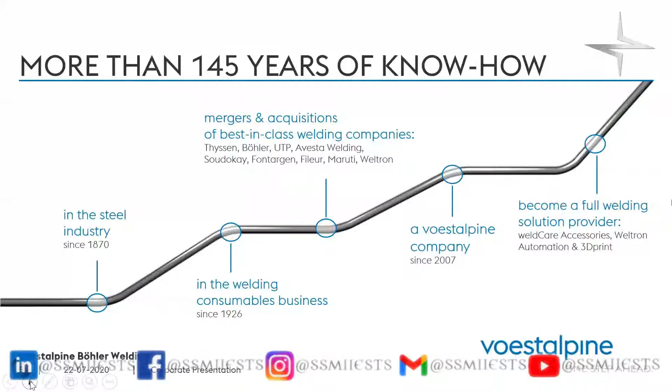So what do we do in this welding consumables business? Basically, we cater to every arc welding application that can be thought of. We are into weld cladding, joint welding, maintenance and repair. We also have a range of finishing chemicals for post-weld cleaning of stainless steel beads. We are into soldering and brazing. And also the new businesses we have launched, like automation solutions, weld care, 3D printing, and equipment. Next.

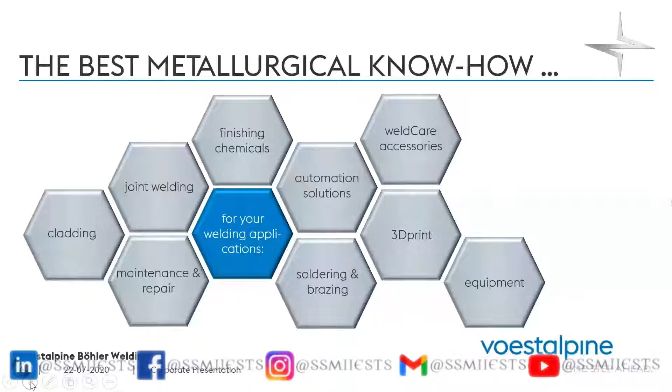voestalpine Bohler Welding has a very long tradition of innovation, and this is really what has kept us ahead of the rest, let's say one step ahead. We are quite strong on creep-resistant filler metals, mainly for power plant and boiler construction and fabrication, and we've been working with Indian boiler manufacturers for many years for these welding consumables. We have now developed a range of nickel-based consumables for the next generation power plant technology, which is called the advanced ultra supercritical technology.

We launched many years ago vertical down basic electrodes for cross-country pipelines. You saw the year 1926. In 1926, we launched Seelendraht, which is basically the German word for flux cored wires. And this is still the technology which runs the flux cored wires of today. And then, of course, a lot of other things like double-coated electrodes, fully synthetic electrodes, etc. Next.

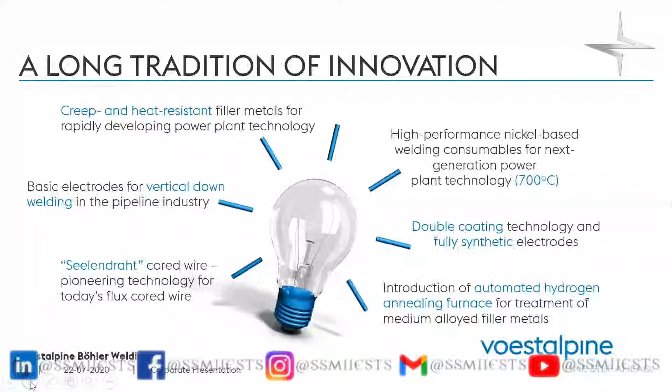So we are a multinational company, as you have probably understood by now. We have more than 2,000 employees in 25 countries with 2,000 distributors across the globe. Next.

In India, we've been in the country for a long time, but as a company with a permanent office for the last 15 years. Mostly we are in Mumbai and Delhi, and we have our factory at Bhiwadi in Rajasthan, where we acquired this company about 6-7 years ago. We locally manufacture welding consumables here, apart from sourcing consumables from our 13 global factories. We also handle neighboring countries like Sri Lanka, Bangladesh, and Nepal out of India. So this is the region India that we have. Next.

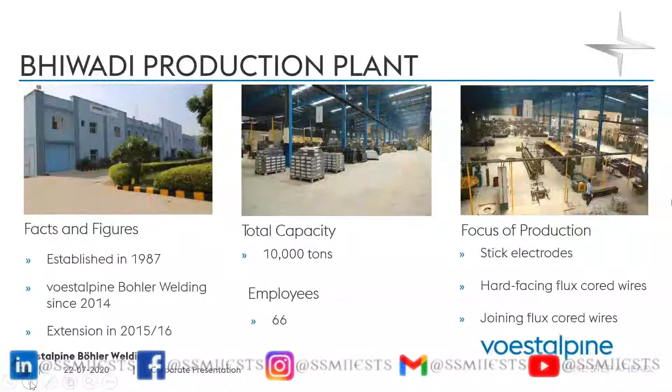Some pictures of our Bhiwadi production plant. As I said, this was part of Bohler Welding since 2014. We have a capacity of 10,000 tons per year of welding consumables. Mostly it's stick electrodes. We also make flux cored wires here, hardfacing as well as joining flux cored wires. Next.

So we present ourselves in the market with three brands and three competencies. We have the Bohler Welding brand, which is mainly the joining range of consumables. UTP Maintenance is for M&R, maintenance and repair. And we have Fontargen Brazing for soldering and brazing applications. Next.

Bohler Welding is the brand under which we have about 2,000 products, which cater to the joining requirements of our customers, starting from joining of simple carbon steels to stainless steels, nickel-based, you name it. This is a brand where we promote the concept of lasting connections. This is the philosophy of this brand. Like you saw earlier, this brand is more than 80, 90 years old. It's been in this industry for a very long time. And the philosophy is that it connects both steel as well as people. Next.

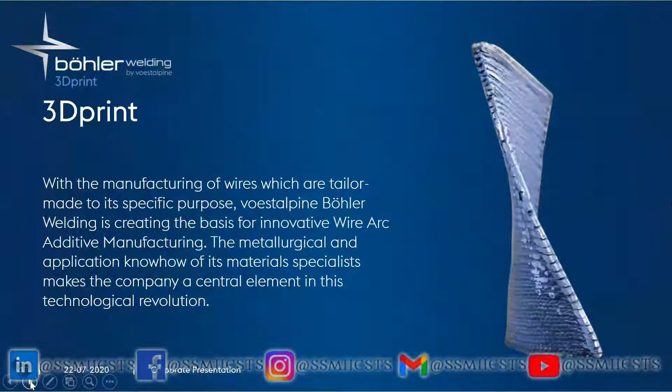We have done a lot of work with research laboratories and institutions, mostly in Europe, on the development of the wires and the procedures for 3D printing. And we have in fact got a lot of interest even in India from industries as well as institutions for working on this. Next.

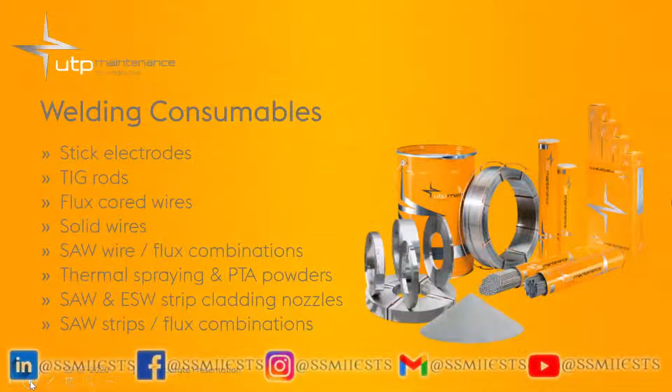Here we cater mainly to, let's say, the steel industry, sugar and ethanol industry, cement, mining, etc. Next. Here again, we have the entire range of consumables, including thermal spray powders, submerged arc and electroslag strip cladding, flux and strip combinations, as well as the accessories for feeding the strips. Next.

Can we go next? Yeah. And I have already moved actually. Yeah, sorry, maybe it came a little late.

Okay, so the last brand we have is Fontargen Brazing. So we kept talking about welding, but we have another, let's say, soldering and brazing portfolio, which is mainly meant for non-ferrous alloys, mainly I would say copper. And this is our brand for that, called Fontargen Brazing, for all kinds of soldering and brazing applications. Next.

So here we cater to mostly car bodies, car engines, and HVAC or the air conditioning industry, as well as the tooling industry. Next. So for this, we have brazing rods, foils, paste, powders, as well as copper wires and preforms for these applications. Next.

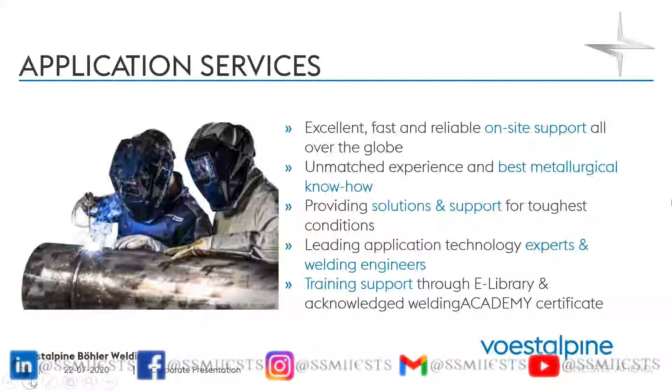In addition to our products, we also offer a lot of application services, which are basically, I would say, how-to-weld services. So we of course have the products, but many of our customers need to know how to weld and how to make sure that you get a good metallurgically sound weld. So we have a team of welding engineers and application technology experts who support our customers both in India as well as globally on these applications. Next.

And we have a welding academy, which is essentially where we have courses mainly for our customers and, let's say, in-house people like distributors and sales teams. We are not a college. We don't give any degrees or anything, but it's mainly for sharing our experience and our expertise with our customers for specific welding challenges. Next.

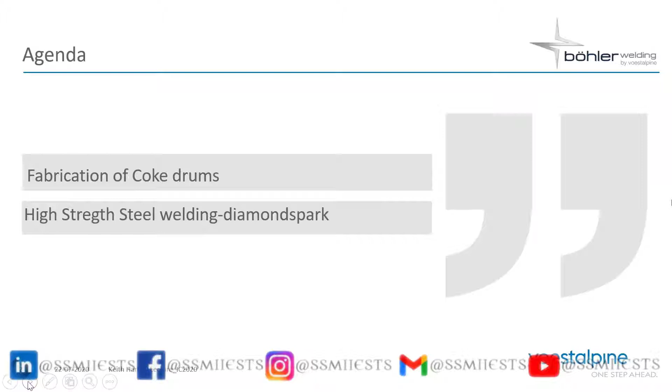And in service, what basically happens is that there is a lot of thermal and pressure cycling in this steel equipment, and this results in certain damages. And because of these damages, the refinery operator has to basically shut down the refinery. He has to either cut open that section and put a new one, or maybe even replace a coke drum.

So I'll just show you some of the damages that actually we have taken pictures of from service, and what is the solution for this. Can we go next? Next.

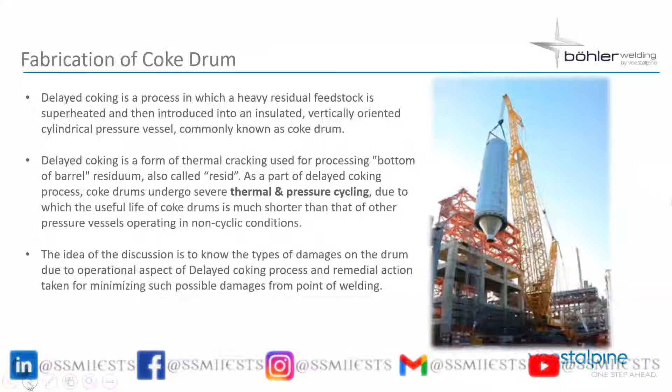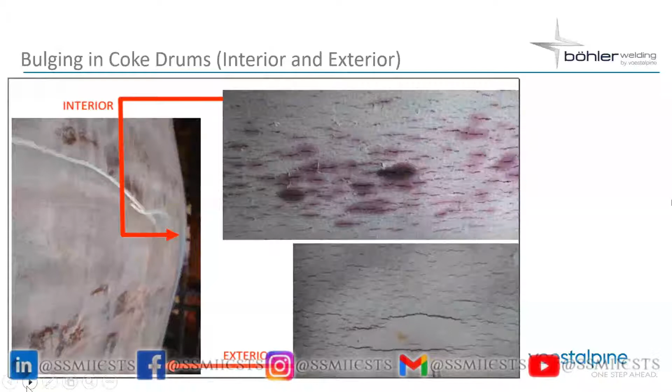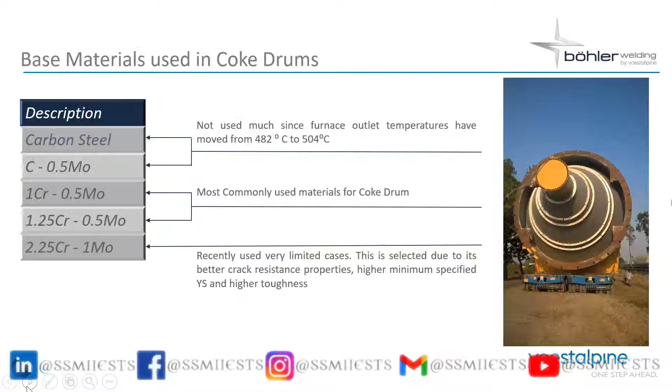Okay, the material used for this coke drum is basically 1 1/4 chrome half moly. This is the most common material. And on your right, what you see actually is a coke drum being transported to IOCL Haldia. In fact, this picture was taken just outside Haldia refinery, where an Indian fabricator had fabricated the coke drum on the west coast of India and transported it across sea, and it was getting commissioned in IOCL Haldia. Next.

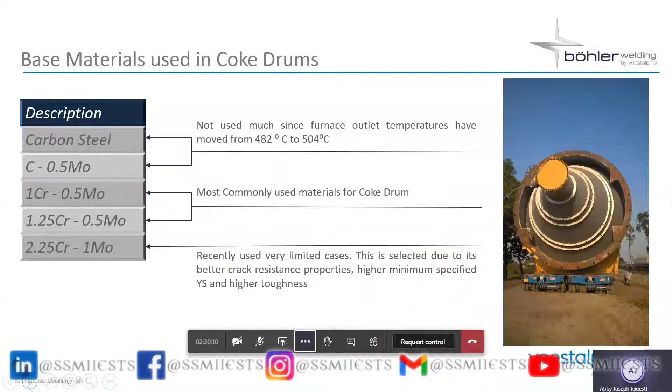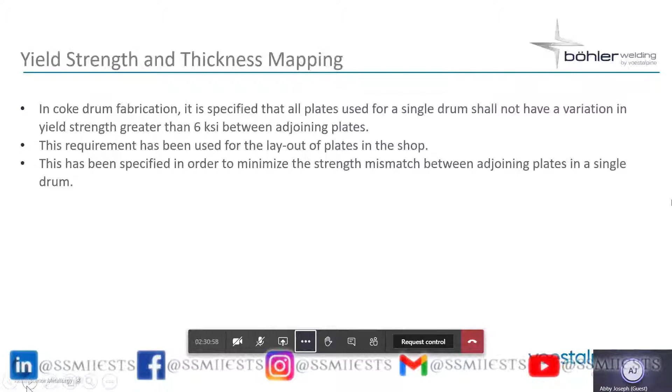So here the problem is that this bulging happens. What people found out in such an application is that it was because of the difference in the yield strength between the weld metal, the weld seams, and the parent material. So what they did was that not only the welding part, but also in terms of fabrication, it was specified that for a single coke drum there would be a mapping of the adjoining plates with the yield strength, and the layout would be made in such a way that there would be a variation of not greater than 6 KSI between adjoining plates. Can we go next?

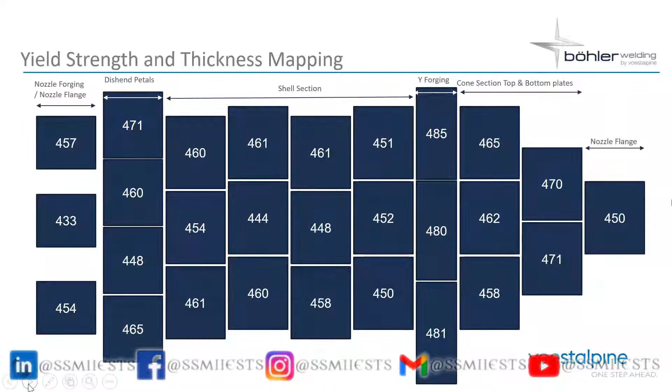So, for example, for the dished end petals, you have between 470 to 450, and then towards the other side, in the cone section, you have 465, 458. Next.

And the challenge for us as welding consumables manufacturers was that we had a limitation from the fabricator that we had to develop consumables. It was 1 1/4 chrome half moly. That's fine, that is a common consumable, but with a yield strength matching the base material yield strength within plus or minus 10%, and this in consumable manufacturing is not so easy. So it was a big challenge, and it needed a full R&D project to arrive at this.

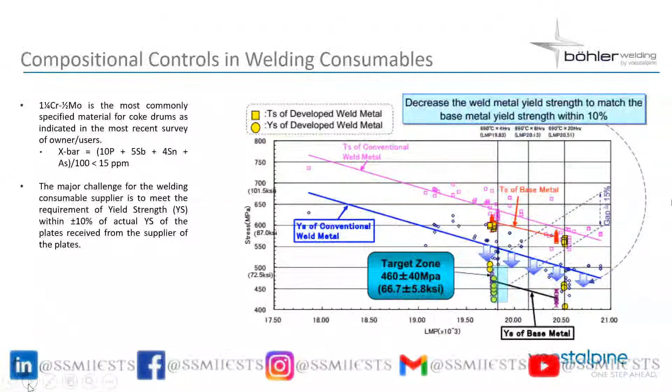And this graph basically shows you the bandwidth within which we had to consistently maintain the yield of the consumables batch after batch, so that it was within plus or minus 10% of the plate material yield. Next.

And so you have the mapping of the plates, you have the consumables which are matching, but after that, during the fabrication, there were many more constraints, like the weld finish, to make sure that there were no stress concentrations, that the weld finish was extremely good, to improve the fatigue life of the coke drum. And we talked about thermal cycling in the beginning.

And also here there was an additional requirement that even for temporary attachments, an approved welding procedure specification had to be qualified before allowing even temporary attachment welds to be made during fabrication. Next.

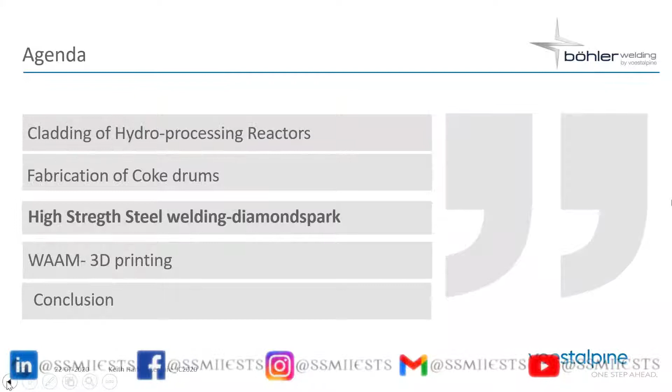So that was one of the examples which I gave, about coke drum fabrication. Now I go to another one. This is what we call Diamond Spark, which is basically our range of seamless flux cord wires, introduced about 3 to 5 years back. It's mainly used in many industries, especially oil and gas, upstream, downstream, etc.

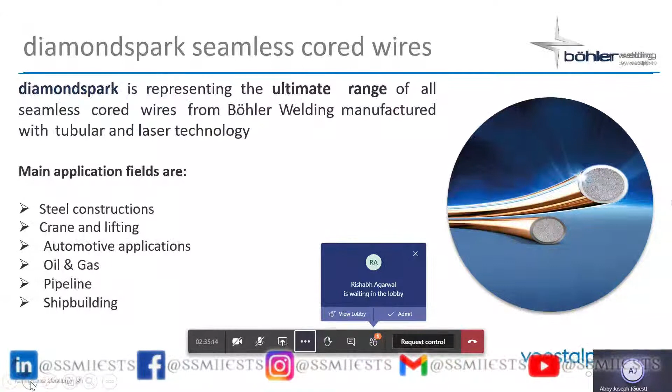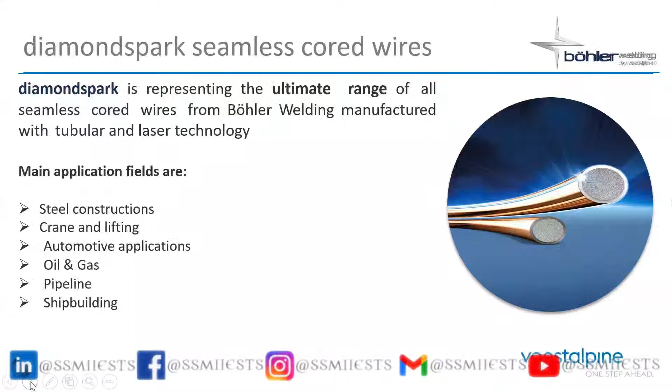So this is our range of seamless flux cord wires used during manufacturing. It uses both tubular technology as well as laser seam welded technology. Main applications are steel construction, crane and lifting, automotive, oil and gas pipelines, and shipbuilding.

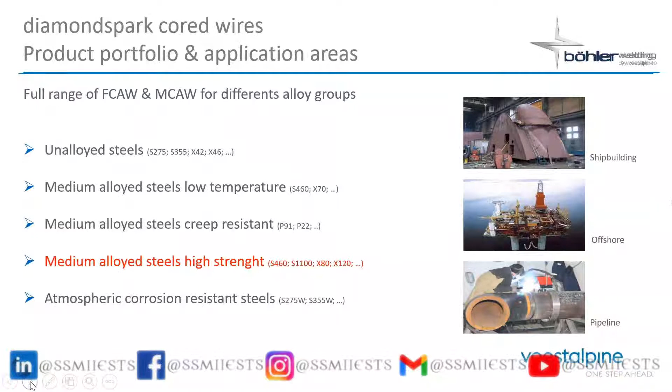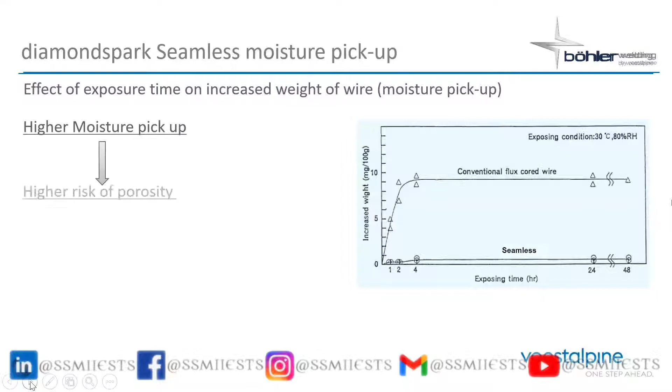With higher moisture pickup, the chance of porosity and therefore repair is very high. This is what we wanted to avoid with this new manufacturing technology called seamless flux cored wires. You can see that even over long exposures of 24 to 48 hours, the hydrogen levels stay less than 2 or 3 milliliters per 100 grams.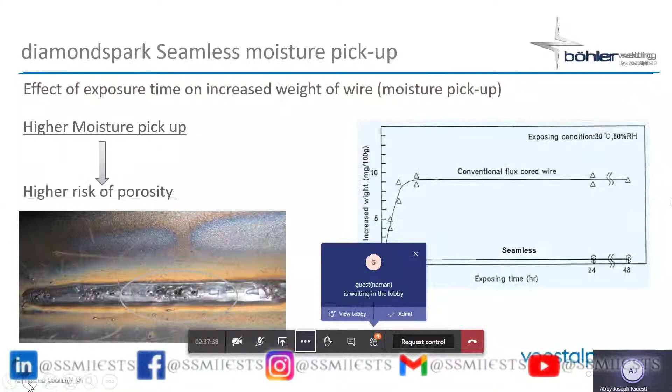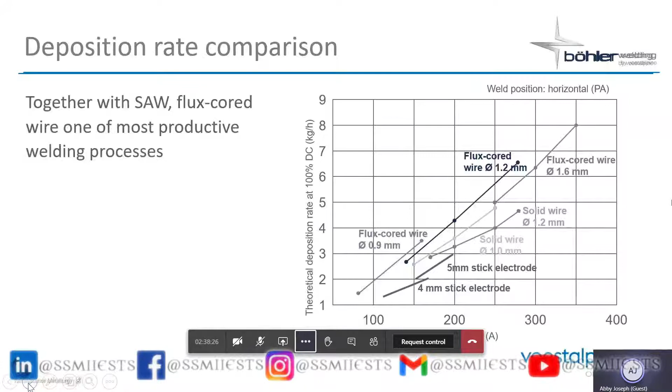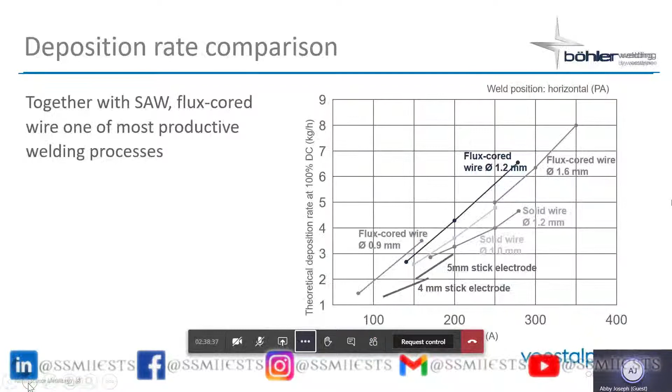Flux-cored wire is also a very productive welding process. You can see here the productivity versus stick electrodes. If you look at the 1.2 millimeter flux-cored wire, it can give a deposition rate all the way up to about 6 to 7 kilograms per arc hour, compared to a 4 millimeter stick electrode, which can give at most 2 kilograms per arc hour. So you have almost 3 times the deposition rate in flux-cored wires compared to stick electrodes, and this is the reason flux-cored wires are picking up more and more in terms of process in India versus stick electrodes.

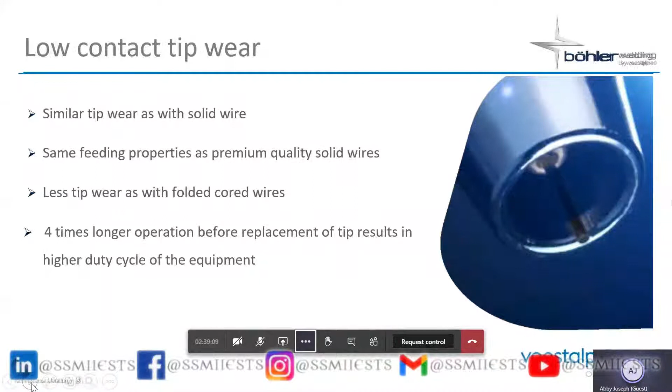With the seamless wires, another feature we worked on was the contact tips. Some of you who have done MIG welding in college can understand what I'm talking about. When the wire comes out of the contact tip, there's a likelihood of the tip getting worn out because of friction. Because this is a copper coated wire, and because of the way it's manufactured, it's a much stiffer wire, so the tip replacement interval is almost 4 times longer than a conventional flux-cored wire.

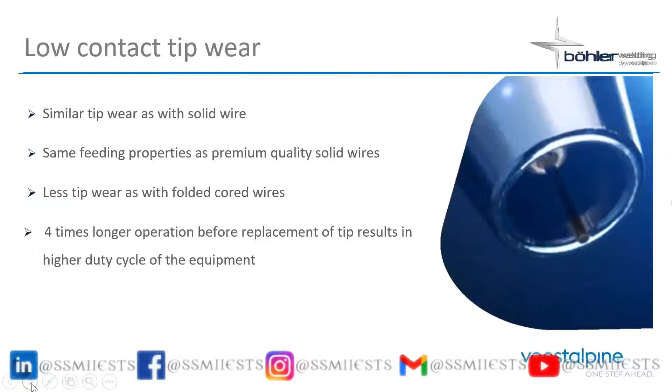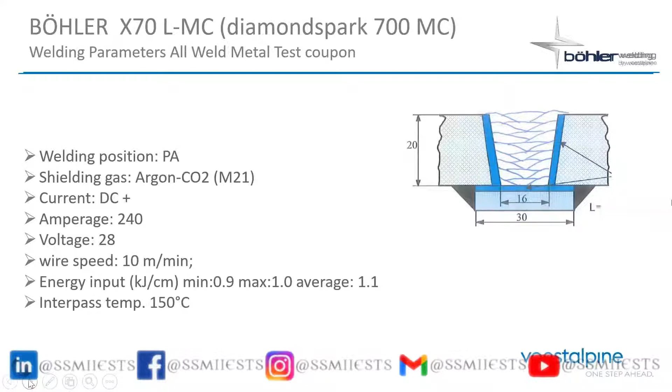This is a particularly high-strength steel welding wire called diamondspark 700 MC. These are the welding parameters we've used, basically a mixed gas argon CO2 mixture in downhand position, on a 20 millimeter thickness plate.

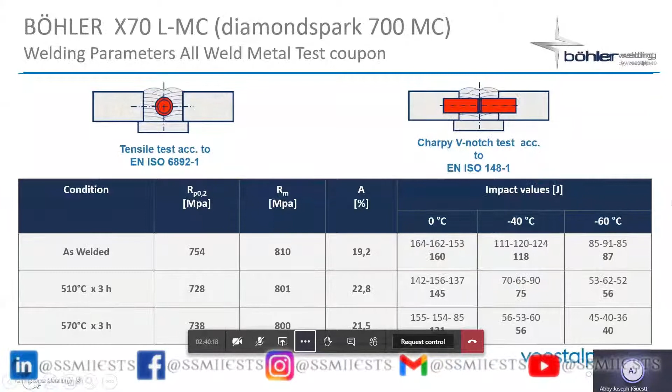These are the all-weld test coupon details. This is just one result, but from a welding consumable development point of view, we need to do many such tests in our laboratory to actually prove these consumables before they are launched in the market. We did it in an as-welded condition, also with post-weld heat treatment at 510 for 3 hours as well as 570 for 3 hours. These are the results we got: consistently the yield was above 700, 725 megapascals, UTS of more than 800 megapascals, as well as impacts right up to minus 60 degrees centigrade.

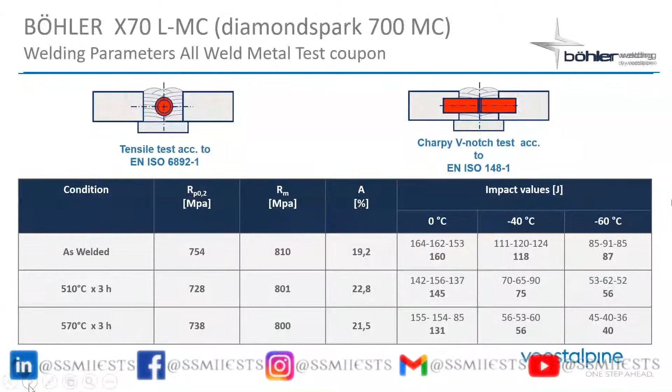This is of interest: we worked with a company called L&T. They have a division in defense, making modular bridges for the Indian Army used for bridge construction. They used very high strength plates, steel, HSLA steel grades like 690 QL being the most common grade, and we proposed these wires mainly for matching the strength requirements of high strength steels, and for replacing 11018M stick electrodes to give better productivity.

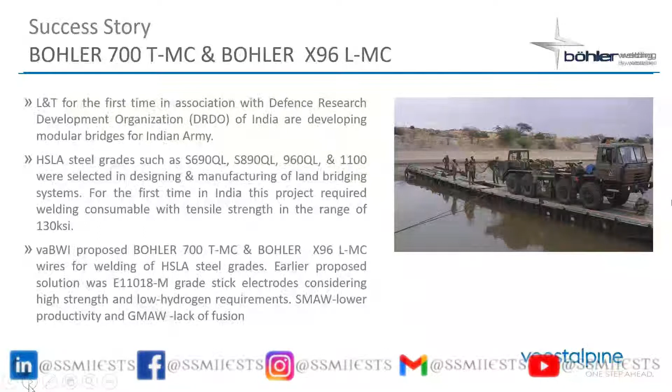This is a picture of the modular bridge. It's modular, so it's folded up and transported to where, for example, the army wants to cross over. It's a temporary bridge created for taking men or even tanks across. This entire high-strength HSLA steel was welded with the seamless metal cored wire I talked about earlier, with thicknesses ranging from 2.5 millimeter right up to 12 millimeter thick joints, and there was a 2 km single pass fillet weld in one of the components.

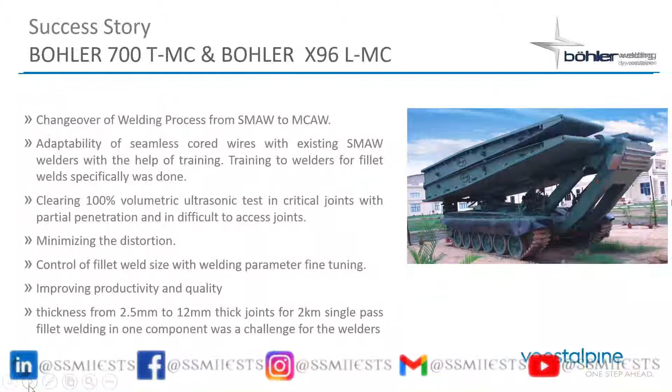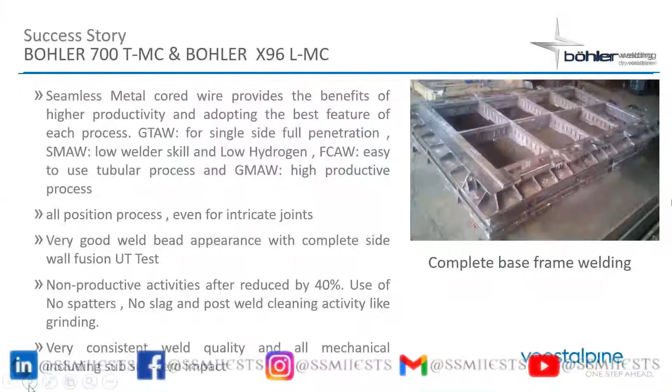So this was my last slide. I just showed you a couple of real life examples of how we develop consumables and applications for industry - one was refinery and one was a defense application. So Professor Kundu, this is all from my side. I'm open to questions.